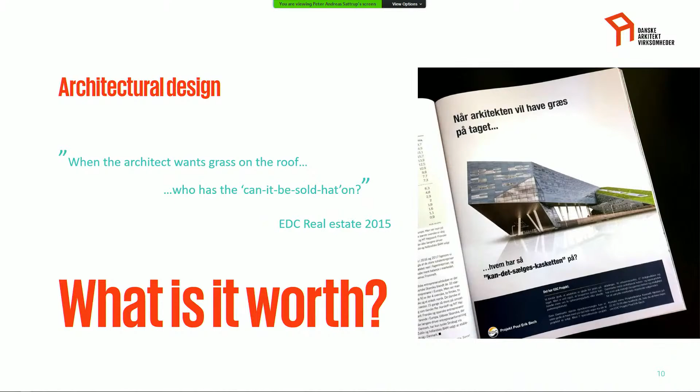You can have misunderstandings like you see in this advertisement from a real estate agent that asks, when the architect wants grass on the roof, who has the can-it-be-sold hat on, implying that the architect is not interested in cost, is only interested in wacky shapes and useless ecological things like grass on the roof.

Which is of course a complete misunderstanding of what an architect does. So in order to change that conception of architects and really show what is it that we do, we created this collection of case studies, which we really wanted to base on evidence and other sources than the architects explaining themselves what the concept is about. So we have a lot of data and statistics underpinning these.

And it's really important to emphasize that this is about value in a broad sense. It's triple bottom line based. It's social, it's economic, it's environmental values. And of course, when you speak of value, it's a question of what are the benefits you get and what is the price. And if we're talking about climate footprint, the price is to the environment.

And that will hit us in the back in a few years once we see accelerated effects of climate change. And then it will come economic questions and definitely also social questions. So we need to see things in connection and in cohesion and the interrelationship.

So just to say a little bit about the power of architecture: it doesn't cost anything or next to nothing to develop a brief, an idea for a project. It does not cost very much to design a project. It does cost quite a lot to build a project, and we are totally focused on the construction economy.

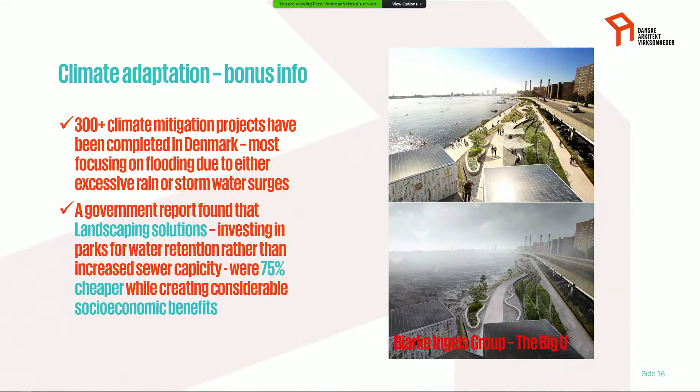You can actually use an infrastructural problem like rising seawater, as in big projects for Manhattan or the flooding project I just showed you, to create social urban spaces. That can have great benefits for urban life once there's not an emergency situation, and that can drive a lot of other benefits.

So how do you actually go about documenting the value? I think it's very important to note that the key is really in the stakeholder dialogue. How do you create shared value? Well, you have to ask people.

You have to work for the investor, but you also have to keep the users in mind, and go back to the users and ask them how they live in this, how they use this, and what is of benefit to them. You also need to address the wider community.

There are social methods and environmental methods you can use to assess and document value. And what we're looking into is not just construction cost - we want to move it from construction cost to life cycle costing, and really see and document the economic upside as well.

In this book, Architecture Creates Value, you can find all kinds of methods to document social value, with cases on how that was done. You can also document economic value and see how this, part climate mitigation and part urban life quality scheme, can really be a good business model for the municipality in which it's built.

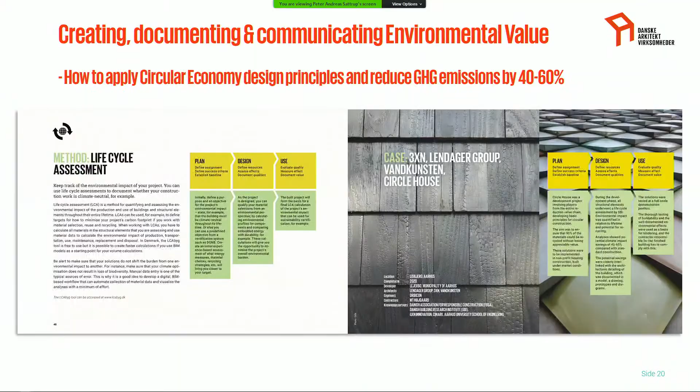That is actually possible for almost all building components in a social housing project such as this. Again, it doesn't have to come with an additional cost.

So the potentials are huge, and we're really looking into making it easy for architects to document these values and contributions that they make with their designs, and further enhance the cases we can share with people like you and within our members, because this is also about building understanding, building competences, and showing that this is actually the power that an architect has.

So we think this is very important to communicate. What are the contributions that you can do as an architect? What is it that we can do not only for our clients, but for our societies and for the communities that we work in? I think once we get the stakeholder dialogue going, and we can begin to talk about ambitions and what we want to achieve with the climate, for instance, or with biodiversity and other sustainability indicators, we can really move this agenda.

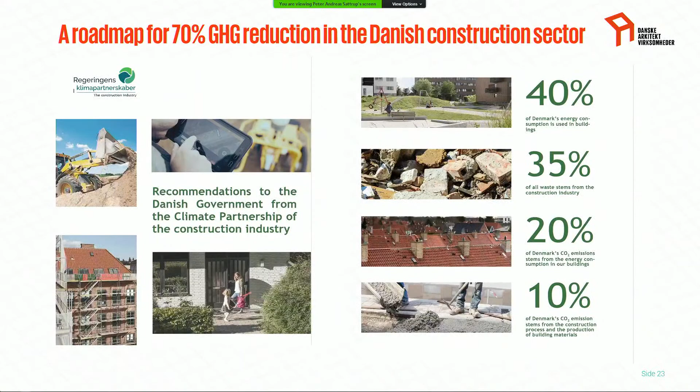From the political level, we've been asking the government, or subsequent Danish governments, to actually legislate and create some binding climate targets that are integrated in the building code. Because the problem is that the projects I show you here are, of course, front-runner projects. They are some of the most ambitious projects we know, and some of the most clever architects we have in Denmark. So, of course, it's not representative of the mass of projects that are not necessarily very ambitious and just do as usual.

I suppose you know that situation from Slovenia as well. And of course, the construction sector is a huge problem in terms of the use of energy, in terms of resources, in terms of creating waste and so on. So this is an agenda where taking the right decision really matters. And that's why architects have a role to play.

Of course, architects don't do it alone. We need to work with contractors, with engineers, with clients, with everybody in the construction value chain in order to do these things. So what we are proposing to the government would be a roadmap for 70% carbon reductions by 2030.

And then, of course, we want an ambitious roadmap for how to reduce greenhouse gases in the building code, so that everybody, the entire industry, knows these are the demands, and we're going to meet them in steps every 3 to 5 years until 2030. And then, of course, we also need to work on energy labeling, because that's a bit difficult to do on existing houses, and we think that would make existing building owners much more aware of the opportunities in energy retrofit. So that points back to the first initiative.

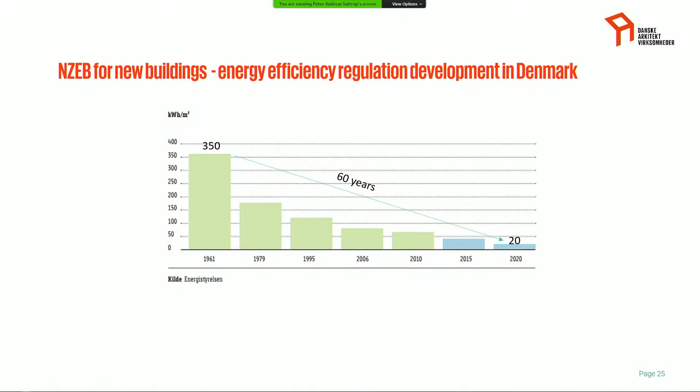So successive governments have actually been legislating energy efficiency for decades, and we've had no real trouble meeting the European near-zero energy building standards ahead of time. So that's been good. And why not do the same thing with carbon emissions? Let's do that. So in order to facilitate that discussion, Aalborg University did a case study of 60 different buildings of different typologies.

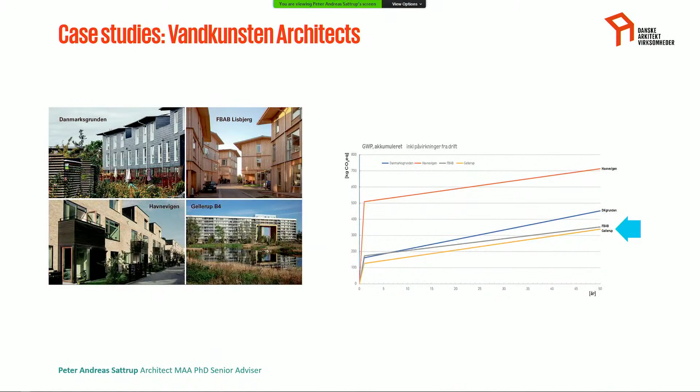One point I'd like to make is that three of them are new builds with different construction technologies. So if you look at these cases, for ordinary construction technologies such as concrete elements and bricks, which is built a lot in Denmark, the embodied carbon emissions associated with material selection are more than 3/4, 75%. So the optimization potential is in the materials. That's also what the other cases in wooden or hybrid construction show — they have a much reduced embodied carbon impact.

I'd also like to note that the retrofit is at the bottom level as well, comparable to mass timber. Actually, the local government argued that they wanted to demolish this problematic social housing project and build a new one. But if that was the decision taken, instead of retrofitting it as Vandkunsten did, it would have cost 3 times as much in carbon emissions. There's really a strong case for focusing on retrofitting as much as possible.

And if not retrofitting, you should use circular economy principles, reusing materials, because that will save a lot of carbon emissions too. Looking a little bit closer now at the best case, the mass timber project.

Well, Vandkunsten doesn't think that we're finished. This project, built in Aarhus, the second largest city in Denmark, has a climate footprint of 5 kilogram carbon equivalents per square meter per year. It's in the very best range, among the very best of the 60 case studies, as you see on the slide.

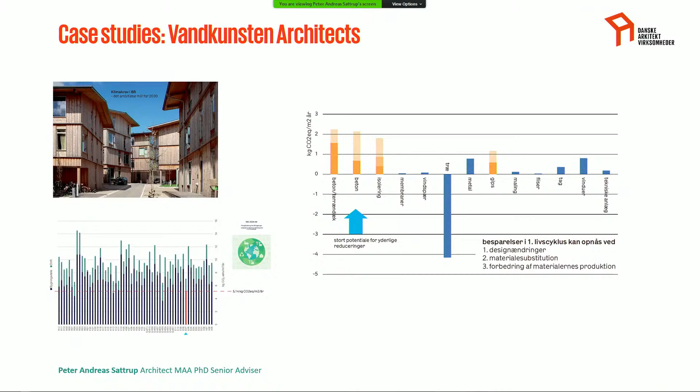Something like plasterboard, the right hand column, can also be halved. And you see the big negative one, that is the wooden construction, because if you can leave that in place, it gives you a negative climate impact. So considering these things, you can save a further 50% even from the best building, and drive the best performing building down to 2.5 kilogram carbon equivalents per year.

So to sum up, at least in the Danish context, we've seen that typical construction types lie in the range from 6.5 to 14.5. You can reduce that by half if you use reused materials and prepare the building for reuse through design principles. If you retrofit instead of demolishing and building new, you will save 75%, depending on how much you retrofit and how much you keep.

What is most important is that all these factors are totally dependent on architectural design and the client's decision-making based on the architect's advice. So if you're an architect or another creative person in the construction sector, you have a lot of power and a lot to contribute to drive down our carbon emissions. Everything you do can contribute to saving maybe two-thirds, maybe a bit more, maybe a bit less, depending on what you do. And you can do that today.

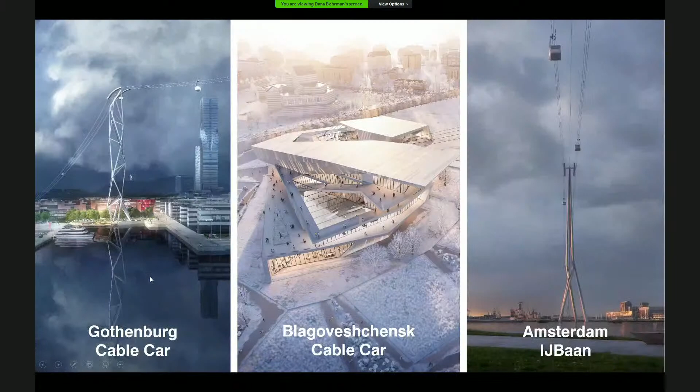It's okay. So this is us, and this is where we are in Amsterdam and around the world. Thank you for mentioning it, Mika. These are the kind of places that we create, like the bridge I mentioned over Rotterdam. One of my favorite images is the sailor who tattooed the bridge on his back. The kind of connectivity we're trying to create, really iconic places in the city that celebrate this idea of connectivity, in cable cars, in several projects around the world, and cultural spaces that bring people together.

As I mentioned, train stations are not just to take a train, they're also to really enjoy an urban feeling, and this iconicity draws people into the city. But the question is how can we move beyond the icon and really think about resiliency.

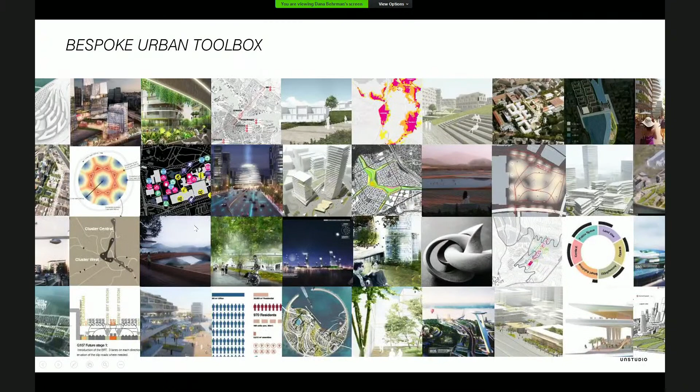This is about our ecosystem of knowledge, UN Studio in the middle, and the supporting groups together with UNSense, and then our urban perspectives of how we see the city with the tools that we use, and Brainport. Was that a quick jump through? We're going to just have to jump into it.

Brainport Smart District. So what is Brainport Smart District? Brainport Smart District is social. It is about bringing people together, creating a community of like-minded people who also want to be supported by new technology and innovation.

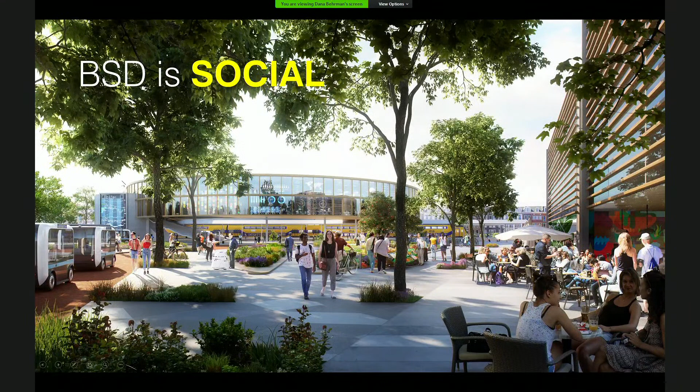It is also circular. So it's pretty much thinking about future resources that we have and how to create new models of usage of our materials, and going beyond materials, how also to save the water systems and the food that we produce and use, and create new connections in a neighborhood.

It's also all about innovation. This is really the key word for this project, is innovation. And it's innovation on multiple levels: on the level of social connections, on the level of data usage, on the level of building methods, on the level of our connection with nature.

BSD was created by a group of people, but really the visionary behind it was Elphi Nelissen. With her guidance and her enthusiasm, she put together this idea of the quadruple helix. It was, of course, not her idea, but she really adopted this model for success, where the government, the municipality, plus the industry, the education, and the society come together.

In order to determine the future of this place, it is no longer only the client who decides what it is—let's say in this case the municipality, or the architect or the urban designer who would sketch an idea on paper. A resilient urban design is about bringing all these stakeholders together and finding the best solutions that could fit that specific location. This is what it is today.

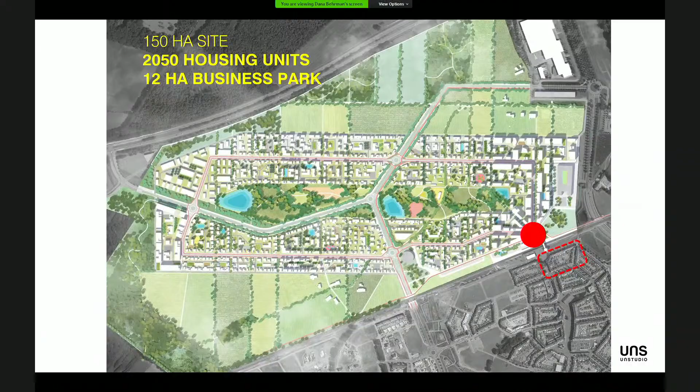But there will be a great development that's going to come there. There's going to be over 2,000 housing units in various densities, a dedicated business park, but also other areas where people could work. There will be a lot of green space, cultural space, and productive space, for people to really test and think about new solutions for landscape and for the buildings.

It has a train station next to it, so that's one of the great assets of the location. It can really follow ideas of sustainability, also on the level of mobility, so it doesn't require driving there with a car.

Yeah, we started with the BSD vision. There was an urban vision that we created together with the client, the Brainport Foundation. They traveled for two years around the world and talked to different innovators who came up with ideas of how to build a new development. We joined after these two years and together tried to give these ideas of new ways of living and working some kind of form and essence.

We worked together in a group. UN Studio stands for United Network, so we built a network around us, inviting landscape designers and specialists in circularity.

The model is quite simple. There's not a lot of houses that could be built there, the site is bigger than what is needed to build. So we've created this kind of density around the central park with different strips that run along the existing water lines. With that, we try to create an atmosphere of urbanity, different neighborhoods and different densities, but still all coming together around this special park in the middle.

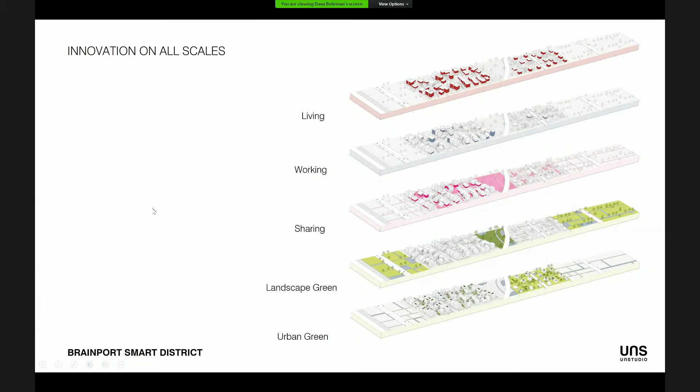It's going to be a mixed-use development. There will be living, working and sharing, also different kinds of landscape. The concept of sharing was developed specifically for this development. Retail will be hard to facilitate within this development because there's retail around that site. But the concept of sharing allows the users to create their own economy and share it between themselves and people from the outside. We hope that will also generate a sense of community. Then telescoping down to the level of the building, we mix uses on all different levels.

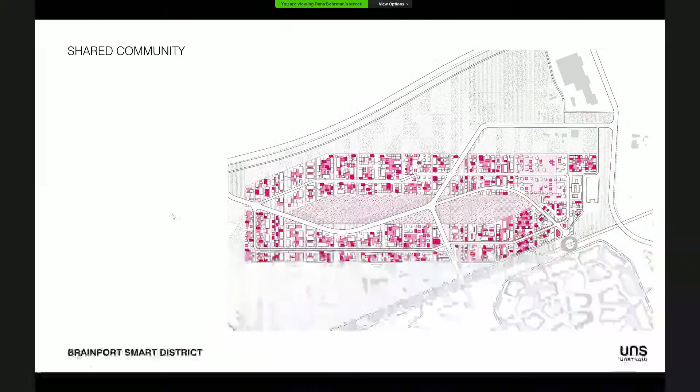That concept of shared community is something new to the client, and new to the users. So they are starting to understand what it means to create a development where you have to create shared space, either internal or external. But the essence of that is that we want to create something really made in Helmond, that's where BSD, Brainport Smart District, is located - something that will generate an identity of the place.

As you can see, it's just a green field right now. It also needs to be future-oriented and natural, two things that may seem contradictory, but in this place they would come together. This future-oriented aspect will be expressed in the materiality, but also in the data collection, and natural because it is in a natural field, and also in materiality and the actual activity on site, which will have lots of gardens and sport places and areas to really enjoy proximity to nature.

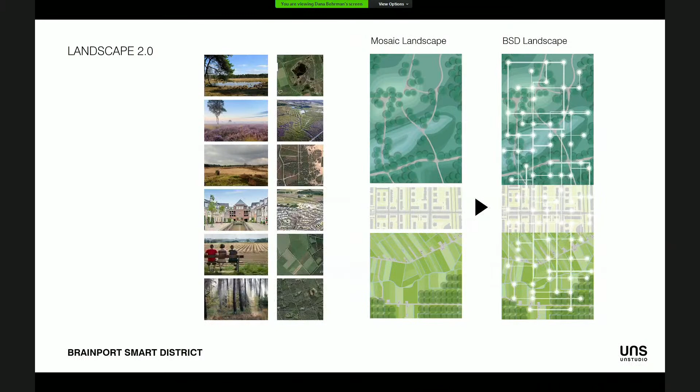Our approach to landscape is, in a sense, no longer a mosaic landscape as it is traditionally, with different parts of landscape separated. It's actually bringing different types of landscapes together with different types of activities, and also connecting landscape to urbanity. We do that by creating really productive areas of landscape where energy could be captured, water could be stored, food could be grown.

But also bringing that landscape right into the neighborhoods, creating connected areas where the landscape brings those neighborhoods together. It's also a cultural landscape, related to the Central Park - a place for people to come and enjoy time together. On the right-hand side, some ideas of future production that will serve the neighborhood.

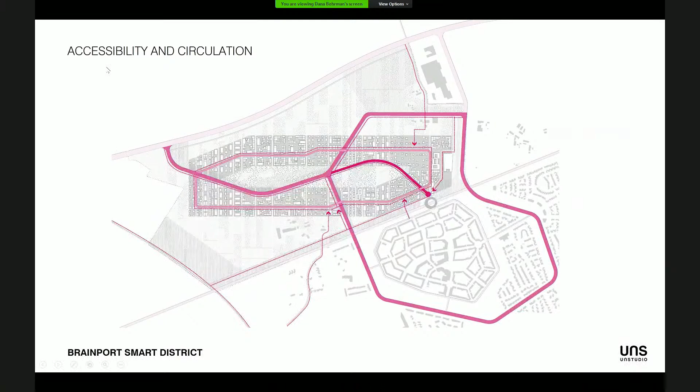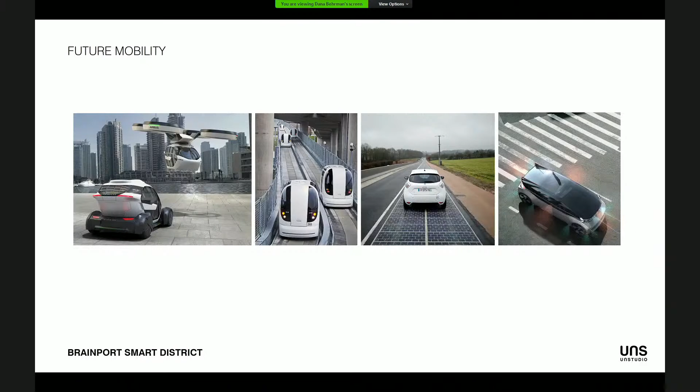As I mentioned, there's a train station, but there's also roads that connect the district to the surrounding area. The ambition is to create a more sustainable, carbon neutral environment. There is currently a discussion about what kind of future mobilities could come there, what infrastructure we need to facilitate, how we can think about the economy of scale, and how we can also allow people from outside the district to use that mobility, expanding the network of green, smart mobility.

There is a whole concept of a data universe. There is an ethics board looking at data sharing and data privacy specifically for BSD. There will be a BSD platform that will allow people to share and exchange data. UN-Sense, our sister company, is very much involved in this and is putting the foundation in the ground for that. So that data universe will really expand to all elements of the site, and will allow people and places to be connected.

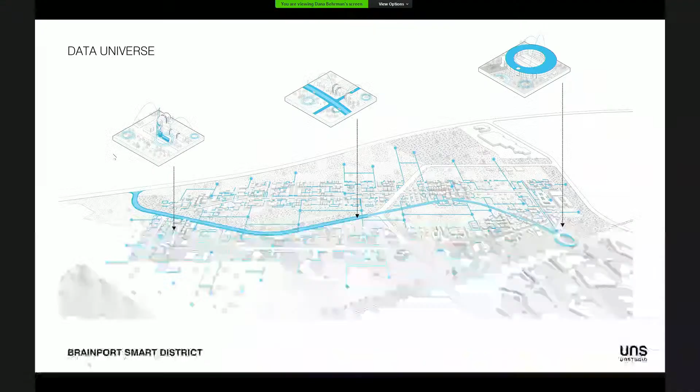And sustainability goes into, of course, energy in terms of reduction of usage, of the production of energy, and the sharing of and the management of the energy system. Water is going to be collected, purified, shared, and of course the food systems grown locally and healthy.

And for that, we did all this analysis of what is the local diet and what would be the ingredients that would be needed to be supplied from within the district and from the surrounding area. How much water are we going to use, and how much water can we share with the surrounding area? And that goes on for energy in order to create energy independence as soon as possible.

And then expanding the concept of circularity to health, to new business models, and to new types of materials.

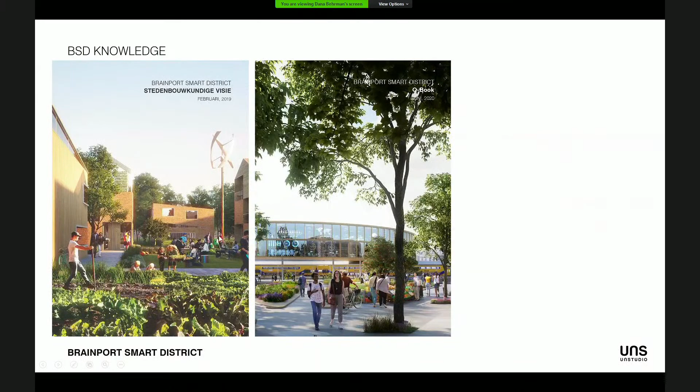In order to facilitate all of this thinking, the Brainport Foundation created a body called the Q team. And for that, we've created a Q book, which really stands for a quality book. In that quality book, there are 8 different domains or program lines that the foundation is dividing the district into, in terms of the planning for building in the future.

And that is a domain that is dedicated solely for circularity, another one for participation, social and safety, health, digital, of course, mobile, and water. These domains, so these program lines, are the foundation of everything that can be built there.

And the quality team is overseeing this development through the eyes of the quality that has been set for each one of these domains. We, together with the Brainport Foundation, have written a book that is a guideline, a book of ambition and inspiration. And that book will guide the future developers in the ambitions on the destinations that the foundation wants to reach when it comes to building.

It looks quite dry, it may be indeed dry. And in order to move away from this dryness and to answer the question that everybody asks us for 3 years, what is it going to look like?

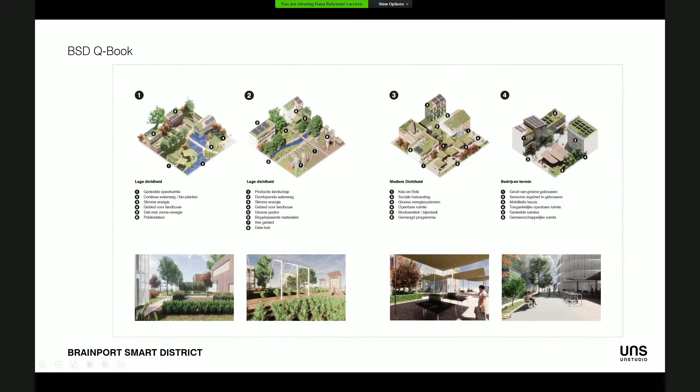We started putting together visuals about how each environment in Brainport Smart District will look like, and what are the elements that actually make these environments. So if it's water purification elements, it will be on buildings or gardens or different types of energy capturing, and then also activities in gardens. And with that, starting to create the identity and the feeling of what it's going to look like when it's there. And we're only supporting the client in that.

They come forward to the Q team and say, I have an idea that I want to test on a small scale. 50 to 100 units is quite small scale. I will test it there. I will learn from it. If I fail, I'll have an opportunity to succeed. And then I will take this idea to the rest of the Netherlands or the world.

And you can see here some of the ideas that already some of the developers have come up with. And we are now at the design guidelines, taking all these ideas and trying to translate it really into space, both into the infrastructure elements and to the landscape.

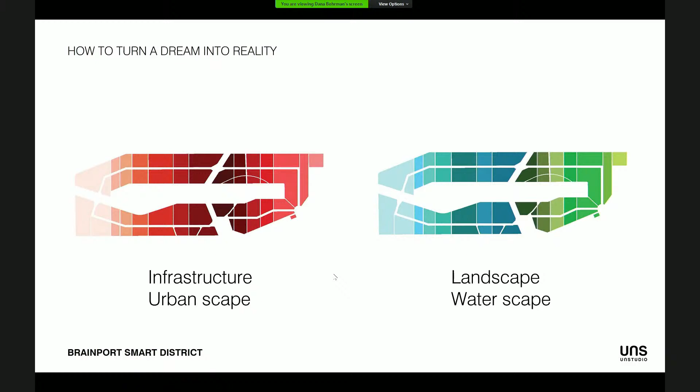We are tasked with creating guidelines that don't limit the developers, but actually try to stimulate them and inspire them. And we are trying to inspire them by testing different systems, different approaches, trying to create models that many developers could take, and by interpreting our guidelines and our system, we'll be able to create something that will be different for each plot, but will still have some kind of unity within it.

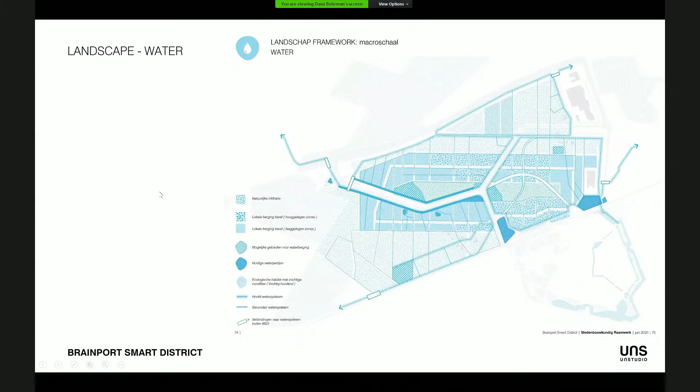That goes for the landscape and the water mechanism that is there, how to integrate that and to create an identity and an atmosphere out of that. And same goes, of course, for the ecology and really trying to think about the local element and the unique elements of the site itself and trying to capture it within the built environment.

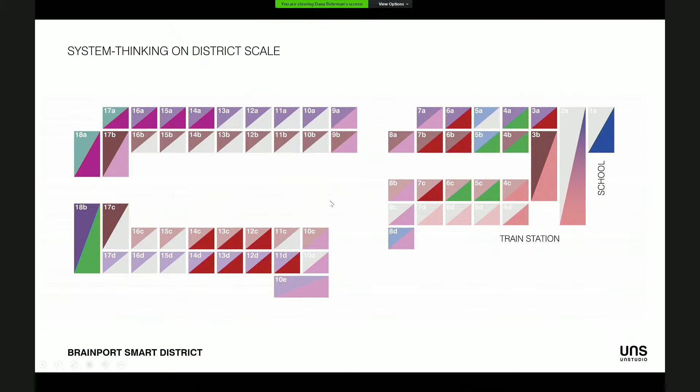So we are now creating passports for each one of the different plots, passports that will guide people on what are the most important elements that should be built in each one of these plots, with the ability to really innovate within that and to test their innovation. And all of that goes through a rigorous process of consultation with the public.

We are actually, as we speak now, in the process of intense consultation with all the parties involved, with developers, with individuals who want to build there, with the different academic institutions who are involved in this project. Our core team is actually consisted of us as designers, but also the municipality and the foundation.

We go through rounds and rounds of ideations and discussions and visioning in order to come up with a model that would actually satisfy all the people involved and really help stimulate inspiration. Not all ideas can be taken, but all voices are being heard. People like to get their hands dirty, sketch, and build models. When we did that before COVID, it was really an inspiring process for everyone. We've done a lot of it online in the past year. But it will for sure give BSD the voice or identity of the people who are going to live there, and that's extremely important because Brainport Smart District is of that region, not of anywhere else. That is manifested in what it's going to be built like.

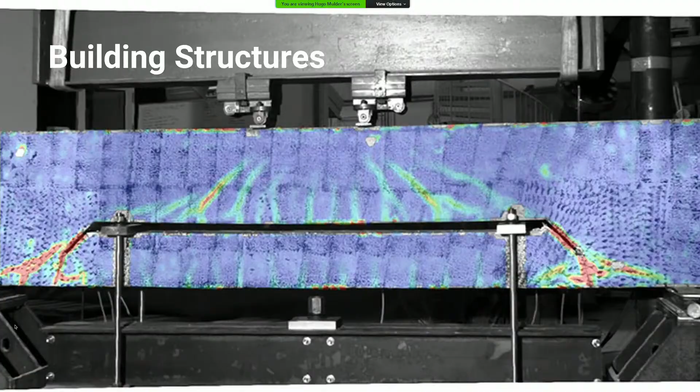The fourth research area is urban resilience, led by Professor Nicola Tollin, who holds the UNESCO Chair for Urban Resilience. This work looks at climate change in cities, and through research and education proposes strategies for cities to deal with this change.

That's a 3-year program that started last year. We're now developing the Master of Science program that will start in 2023, following up on the Bachelor of Science. The Master will also have a collective part, but then it will separate into specializations in these 4 research areas. We've identified 3 basic pillars that we focus on heavily in the program: sustainability, digital practice, and design.

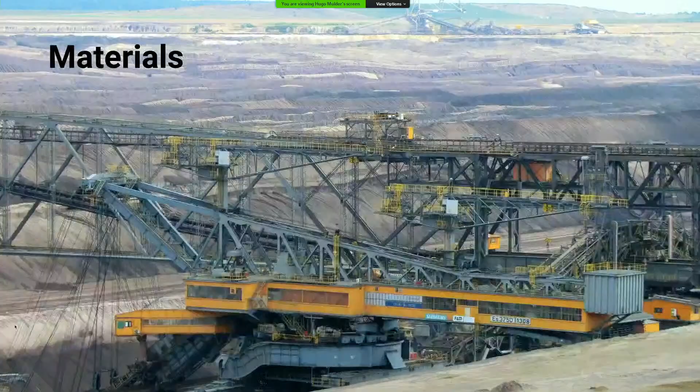If we start with the first point, materials, we can start to see the impact that we have on our planet just by extracting raw materials. The scale of the impact is so significant that some people say we have entered a new geological time, which we could call the Anthropocene. It is not the natural forces of the planet anymore that dominate the shaping of the Earth, but it is us, humans.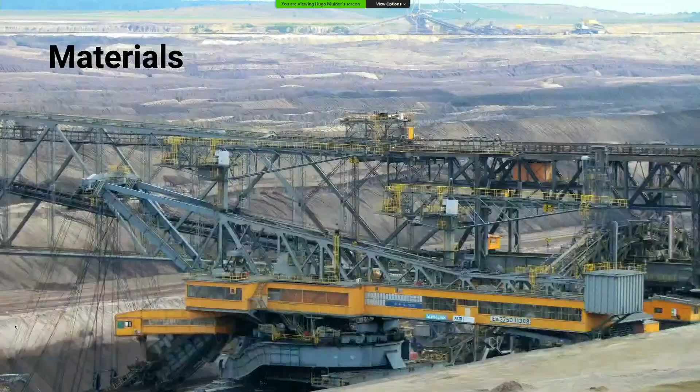In fact, the built environment is responsible for somewhere between a third and 50% of all extracted materials. So the second one is waste. In EU terms, we talk about construction and demolition waste. Construction waste is basically everything related to the beginnings of buildings, which would be packaging of building materials, residual materials, dealing with mistakes on building sites. A lot of this is due to the complex logistics of building sites, so it's not an easy problem to solve.

The largest part of the waste is due to demolition, which takes place either due to renovations or at the end of a building's life. Due to traditional building practices, it might be difficult to separate building waste into the original materials or even into the original building components. And again, if we look at the numbers, we can see that in Europe, 37% of all waste is construction and demolition waste.

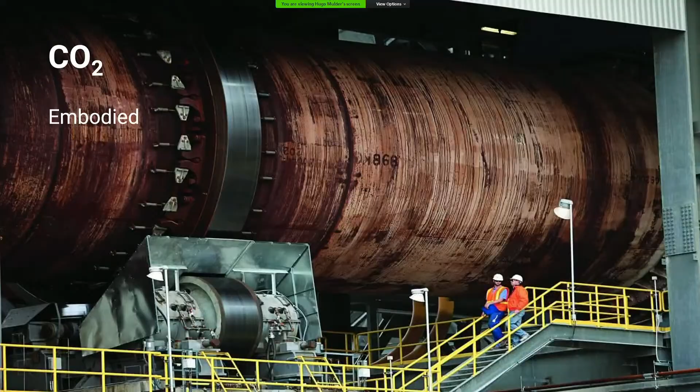In terms of overall emissions, the built environment is responsible for about 30 to 40%, where about half is embodied and half is operational energy. But as we see buildings become more and more efficient, the embodied part of the energy is becoming the key issue.

In overview, the built environment is responsible for about 35 to 50% of materials, 37% of all waste, and 30 to 40% of CO2 emissions. Because it's easier to remember, we've referred to this as the rule of thirds: built environment responsible for 1/3 of all materials, 1/3 of all waste, and 1/3 of all energy. But as we've seen, that may be a bit of an understatement.

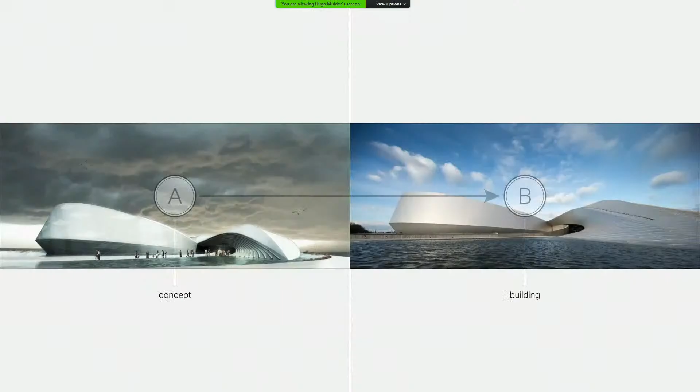Of course, you can do a lot of research and innovation within a process like this, but there's certain things you don't get to do, which is kind of what we get to do in GXN. You don't get to ask too many open-ended questions. You don't get to test out untested materials. You don't get to make too many mistakes because mistakes are costly.

What we get to do in GXN is ask these open-ended questions, test out new things, and make mistakes and learn from our mistakes. GXN is set into the world to be a research and innovation company. That means we don't necessarily know where we're going to end up. We might have an idea, but we usually start from an idea or a research question. We work collaboratively with research funding from different partners, which means we can de-risk the process of exploring what that concept or idea means.

Our output is often not a building, but different things. For example, we've made new materials from upcycled agricultural waste. We've looked into robotic fabrications and workflows. We've done behavior strategies for how to improve buildings for people. And we put out a lot of books, so all the knowledge we generate in GXN, we put out as open source knowledge.

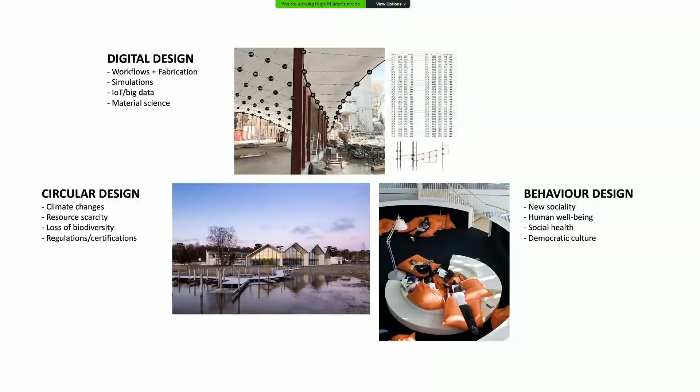We work across three fields: behavior design, digital design, and circular design. Increasingly, we're seeing these fields being mixed, so for example we look at relationships between circular design and digital design in material passports. But if we just look into the circular design problem, which is what we're talking about today, we cover quite a few things, anything from actual buildings.

What you can see there under the name of low carbon design is a new hotel—an all-timber hotel that we built on the island of Bornholm. We also do strategic collaborations with the likes of Arup, the Ellen MacArthur Foundation, professorships, publications, government advisory.

And we have a specific project which we talk to the students about in order for them to train in circular economy. That's the project I want to explain here, what we're talking about when we talk about circular economy. This project is the Circle House.

The Circle House project is a research and development project that came out of a book we wrote called Building a Circular Future. In that book, we looked at what it requires to actually do circular economy—design circular buildings, construct circular buildings, and maintain circular buildings so we can reuse the materials at the end of their life. That's the idea with the circular economy.

In a linear economy, the business-as-usual scenario that Hugo just told you about so eloquently, we take resources out of the ground, work them into products, put the products into our buildings, and then once we're done with the buildings, we tear them down and throw away the resources. In a circular economy, we want to make sure we can keep the resources circulating at as high a value as possible for as long as possible.

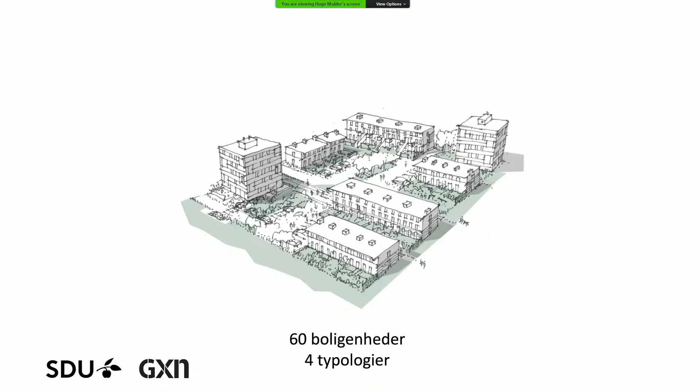There are 60 units all in all, 4 different housing typologies to really show the diversity of what we can do with circular economy or circular design. All these units are designed to be fully circular, and for this specific project, we define that as being able to take 90% of all the materials and products that go into them and reuse them at the end of their building life with no significant loss of value.

A large part of that is figuring out how we design for disassembly—how we design so we can take things apart again, and how we then maintain things. One of the key things for this, and one of the key things interesting to talk about with new engineering students, is of course the superstructure.

So for this specific project, we're looking into a superstructure that's based in concrete. It's one of the most popular building materials still in Denmark, prefab concrete elements. We're looking at ways of introducing reversible connections into the superstructure, so that we can actually take them apart again, for example, using lime mortar. I can show some of this in a second.

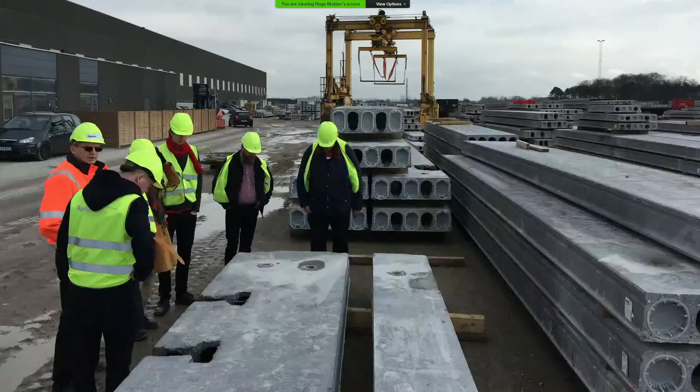So if you look at the elements first, we researched with the industry. This is a Danish element producer called Spæncom. We went to their factories and had a look at how they create these precast concrete elements. One of the interesting learnings from here was just how much variation you can actually get into precast concrete elements. They've got a very sophisticated, quick setup where they can rapidly change these elements.

What we wanted to do for this project was create a simplified system of very few elements. Working with the engineers and architects, we came down to just 6 elements: 3 overall components broken down into 2 wall elements, 2 slabs, and 2 beams. Out of that, we can build all 60 housing units. So that's the simplified building system.

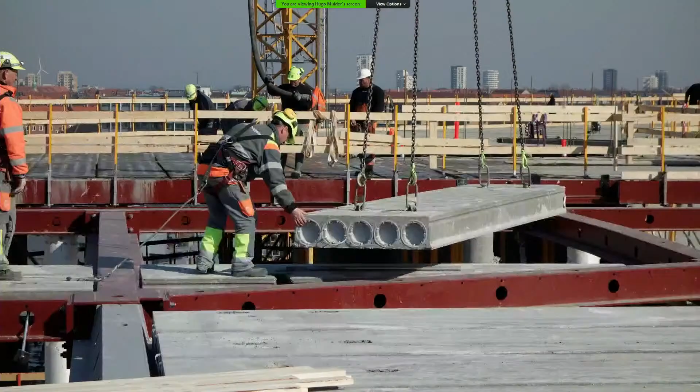We are then looking at the connections and the fittings. One of the key things is that we can take things apart again. When working with these prefab elements, it's almost like building a large-scale Lego house. You put them in, but then we end up in a situation where everything is put together, and in comes a cement mixer and pours cement into all these connections, and what was reversible becomes fused together in ways so we can't take it apart.

So we really wanted to see if we could create a reversible superstructure. We looked at all the different connections in buildings, in the superstructure, and tried to think about how we might do reversible fittings. Through this research, we got in touch with a Finnish company called Peikko.

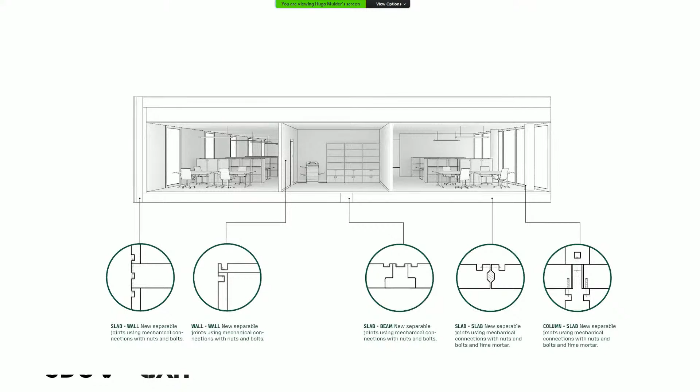Peikko have developed a series of mechanical locks that you can utilize to fuse concrete elements together, which is more or less almost circular, but not all the way there. One of the key elements of their locks is what they call the Sumo Shoe, which allows for mechanical connections between elements.

You have the different elements on each side of that box in the middle. That box in the middle is hollow, and this is where you can tighten the screws and bolts that hold everything together. In order to ensure fire safety, these boxes are normally covered over with cement to fuse everything together. And cement we can't get out, so we can't really reverse the setting.

So what we tried to do here was work with a Danish company that does lime mortar, to see if we could utilize lime mortar to get the same qualities, but then actually be able to wash it out, which is what you're going to be seeing in the next slide.

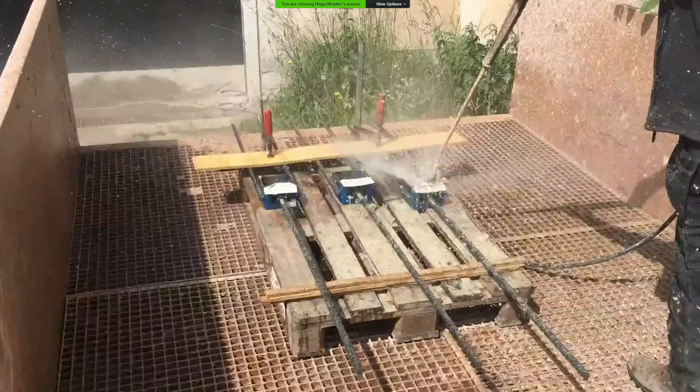Well, as you can see, it's actually fairly easy to get this out. Sorry for the video quality, it's a little jumpy, but we did a couple of tests like these, and all of these washed out quite nicely. Now we have access to the bolts, so we can actually take the elements apart again. This was a small-scale prototype. In order to convince the industry that this was a possibility, we also did a full-scale demonstrator unit.

This is built in front of the Housing Association here in Copenhagen, Denmark. During that construction, we learned a lot of things, and these are some of the things we could then share with the students.

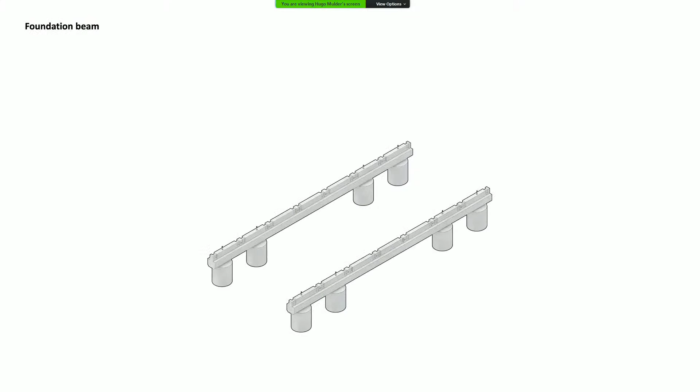So, for example, we looked with the students at the system itself. This is sort of how it is: we have the beams, foundations, then come the floor slabs, then the walls on top of that. You add the next floor slabs or beam, and then the next floor slabs.

This is, of course, not exactly how fast it was, but it was actually very fast. We managed to build this 10% faster than expected because of the mechanical fittings and the simplified system, which points to the savings we can actually have with the circular economy.

We could then share the details with the students, but there are some interesting ones. For example, this is a detail from the engineer showing how the individual floor slabs are held together with a steel plate in the middle.

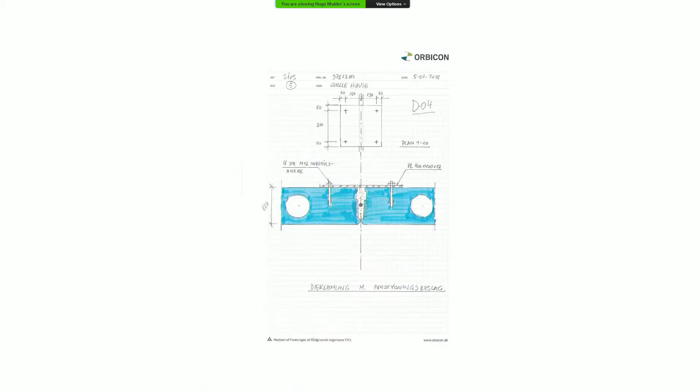We can look at the next slide and sort of see how that works from the top. With that steel plate and the way we're looking at how the beams work, we were then able to actually also create soft spots in the building.

If you go to the next one, you can imagine that some of these floor slabs can actually be lifted out. So if we have a building stacked with several floors on top of each other, we could create openings to, in the future, for example, change a unit from being just one floor to maybe two floors by putting in stairs.

So one thing is the reversibility of the structure itself. Another thing is the adaptability for it to maintain its life over time. These are some of the things we could then talk with the students about: what does it mean to make these mechanical fittings, what opportunities does it give us, what does that mean for layout, where can we have a soft spot, is it possible to have it anywhere in the building, or do we have to think about services and so on. So a lot of interesting discussions there.

If we move on, we can see some of the fittings for where the wall elements are being put in place. I think you get the picture of what it is we're trying to do. Again, some technical drawings for how this works.

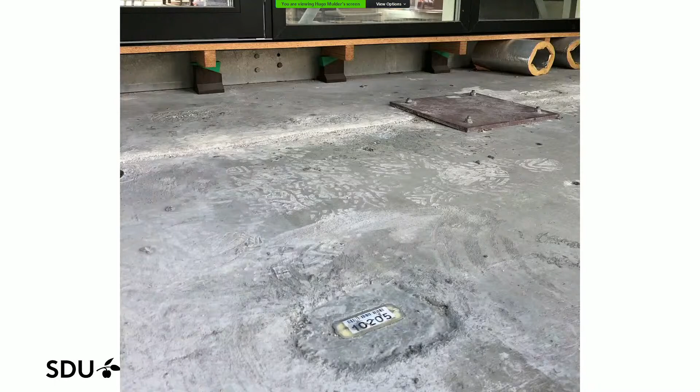This is an interesting one. We're experimenting with a lot of different solutions. This is a very lo-fi material passport: a QR code that we can cast into the individual elements, and if you scan that, you get information about the elements and the number of elements in the total building.

So traceability, of course, becomes important for the circular economy. If somebody takes this building apart in 60 years and wants to reuse the elements, we've got to have a paper trail, or in this case a data trail, on what these elements are and how they've been utilized.

We also looked, as you can see in the next couple of slides, at different solutions. This is the facade, for example, where you can see we are utilizing a stone cladding from a Danish company called Komproment, which is set up on these reversible frames so you can easily fix them out. We also tested on the same frame utilizing these burned wood shingles.

These shingles are taken and upcycled from the Danish metro building. We had these plastic shingles on the other wall. These shingles are used - this is already the second time they're being used. They've been put up in a building in the Netherlands before.

We also looked at different solutions in the interior and really used this demonstrator to showcase all the circular solutions that are already on the market - ways of doing partitions that are reversible, upcycled furniture, and so on. The point of the demonstrator was, of course, to show that this was possible, but also to make it safe for consortia to actually bid on this project once it was put out to tender.

It is a social housing project. It has to be able to compete on market terms. We just had the tender out and successfully completed it, and this is now being built over the next 2 to 3 years in Aarhus.

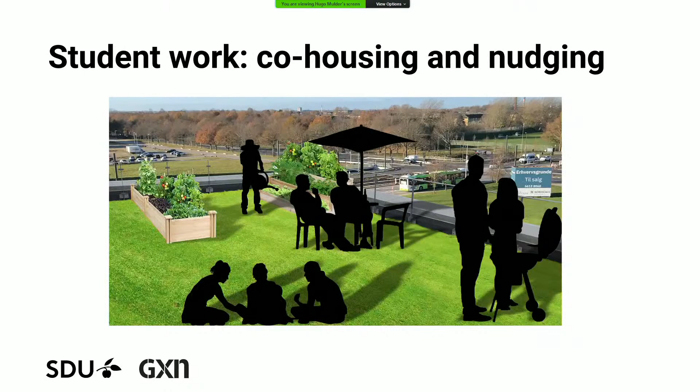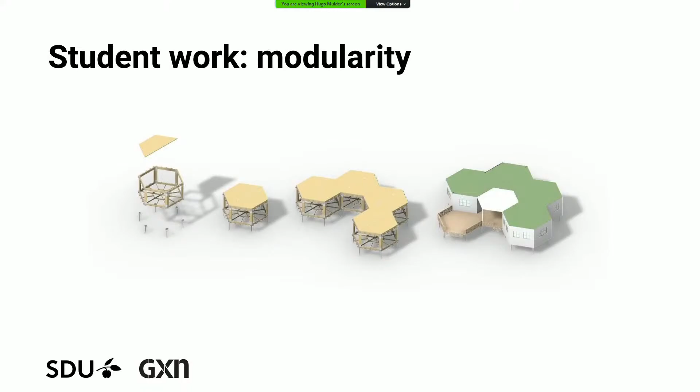Other groups developed concepts for modular houses that would grow and shrink with the needs of families. As families grow, they may need more space, so you could easily add units to the building, and when that space isn't needed anymore, these units can be taken away again. Or they developed flexible solutions so that space can be used in different ways.

Some students also looked at related topics. One was on biodiversity, looking at how green roofs can make a difference in bringing back species of flowers and insects into urbanized areas.

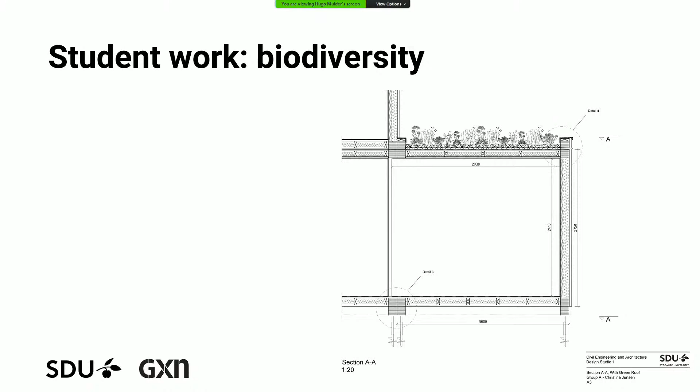Thank you, Hugo, and thank you, Cor. It was a very insightful presentation that shows architects and engineers have to work with industry to actually change the industry, especially the principles of building that are still quite old-fashioned, I think. And also that we architects have to think much more about materiality and what kind of materials we put into buildings. Do you think there's a chance of finding an alternative to concrete in the near future? It's a bit of a flat question, I know, but I think it's something that any builder or architect would ask.

Yeah, if I can go first, maybe Cor can say something as well. I think, to be honest, it's very difficult, but I think there may be ways around it. The production of concrete is very intense in terms of raw materials and energy, of course. But if we can make use of the material much longer and in a more flexible way, we can benefit. Ways of doing that include making sure elements are modular so they could be reapplied after being taken apart, that we monitor what's happening during their lifetimes, and that we have a paper trail or material passport, as Cor mentioned, so we actually know what the elements are when we take a building apart. Those would be huge improvements over just destroying concrete and losing its value.